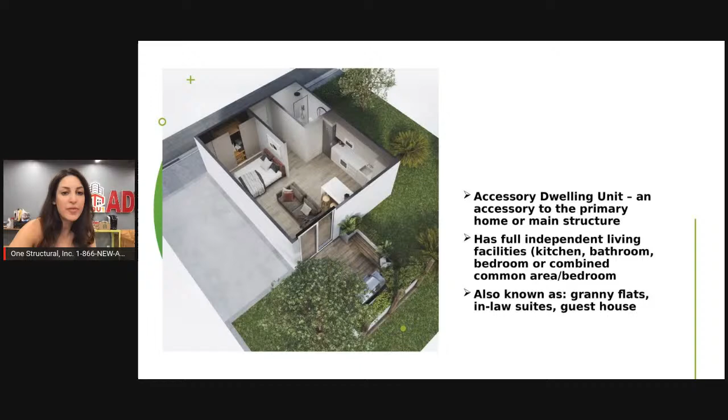That's our specialty, multifamily properties. We do still serve single family, but our specialty and focus, and especially in construction, has always been multifamily properties, whether they're single buildings, detached buildings, or very large HOA communities. That has always been our specialty across several trades. So now, luckily, apartment buildings are able to add more units, increase housing across the state, and increase the value of their property and get more monthly revenue, which is great.

ADUs have always been used for expanding your home, additions. This is more for single family relations, family staying with you, elderly family, which again, we do help with, but our focus really is helping you maximize your rental income. So that's kind of part of our feasibility reports. We provide these pro forma statements, market analyses, stuff like that for which configuration, within code and space permitting, can you do that's going to get you the best return?

And of course, that's based on construction costs versus the configuration that you can build, all compared to what rental income these sizes and styles will bring you. So we work with you to kind of help find that sweet spot for finding just what is the best use of my money for rental income, value, and so forth.

The types of ADUs that you can do, I will differentiate between single family and multifamily. The main types of ADUs that you're going to read about and hear about are attached and detached. They're pretty similar for both multifamily and single family, but there are a couple of differences.

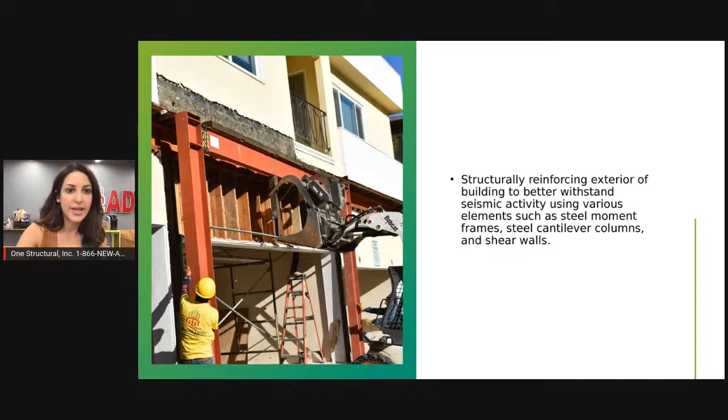So you can do it as these diagrams suggest. You can combine your seismic retrofit requirements, always meeting code, with the addition of these units. And so that would always be incorporated in the engineering plans that we design. So here's some samples. This is a multifamily building that needs to retrofit and wanted to do the ADUs. I think this is in Inglewood, and right now in Inglewood it is voluntary to do it.

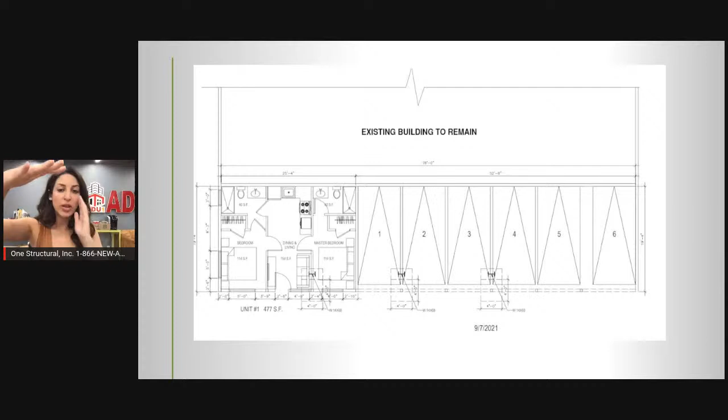But these owners were very proactive and smart, I would say, because you don't want an ADU in a tuck-under area, and then later in 2 years, your city does require you to do that, and you didn't have shear walls or that reinforcement in your ADU. You will have to go do the construction because it is technically still soft story if there are no seismic retrofit elements in the design and structure of that ADU. It's technically still an open space underneath a dwelling that wasn't reinforced. So we always recommend that if your city has not required it or mandated it yet, we will still give you that option to incorporate retrofit elements too.

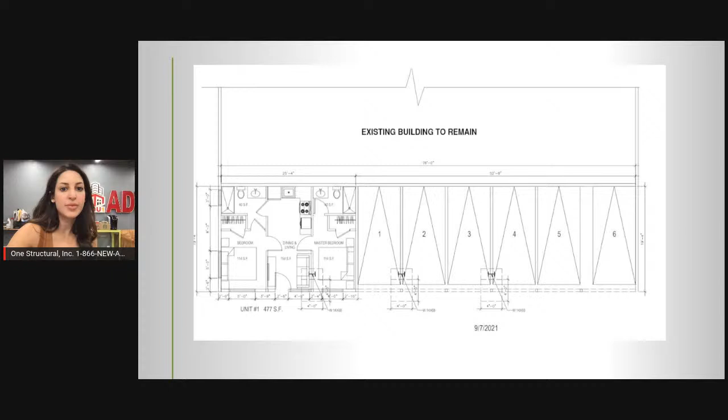So this is, I believe, the same building. This option was showing if they put the unit here, they would still have to, I don't know if you can see my cursor, still put some steel columns in the middle of the building because it was a 3-story building. This option is showing if you put the ADU in the middle, we could just do shear walls and incorporate it that way without additional construction outside of the ADU.

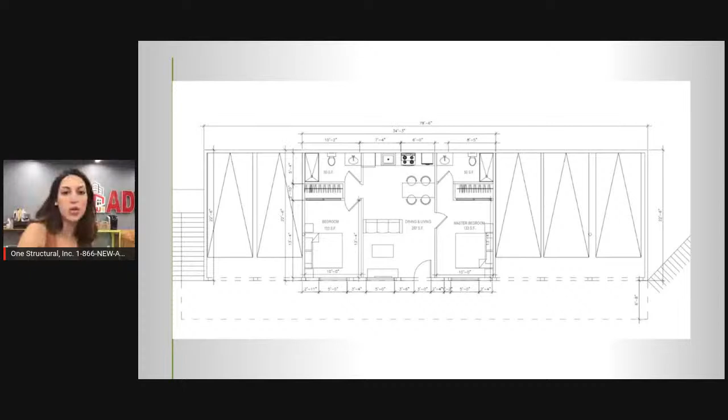I believe they actually ended up going, it should be here, sorry, with the ADU on the right side actually, but using more spaces. I think that's what they went for. I have to jog my memory. They went with using more parking spaces so that way the ADU gets some private patio space on the side, doesn't have to worry about cars entering, and then they were still able to use the shear walls too. So it's a really good choice.

And at the end of the day, people need housing that's going to be priced for what they can afford. If they can't afford a 1,000 square foot unit, it's going to be brand new, beautiful. It's housing, shelter over their head, new, designed very nicely, so it can make somebody very happy and be within their budget. So these units are needed for a lot of people or families.

Here is just showing some more design. This is somebody who's doing the up to 2 detached in their rear. There was, I think, an old dilapidated garage there that we're proposing to demo, and we are going to build basically a duplex in the rear of this multifamily property. This property specifically was in the historic preservation overlay zone, so we had to get the HPOZ involved and get their approval. It has to go through their clearance. So there are a lot of steps involved with this, but again, we handle it all, and we are familiar with all of the design guides for the HPOZ and historic sites.

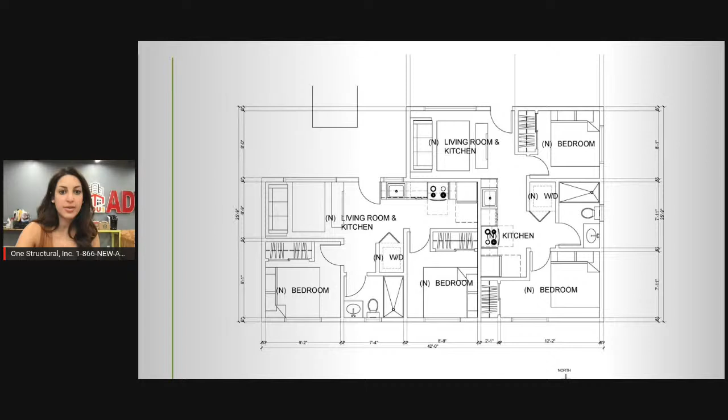This one is showing multifamily again, because that's our specialty, but we do have some single family in the pipeline. This is an existing carport in the rear of a multifamily property. We will be building 2 units on top. So we're going to be adding a stairway. We reconfigured the parking, so if you see here on the left, parking will just be pushed down, because parking can be in the setbacks and property lines. That's fine. But the building cannot. All new construction must adhere to setbacks.

So it is designed with the 4-foot setbacks all across. And actually, there's more that I can get to it. We had to get DWP clearance for this, encroachment clearances. They did have their own requirements, which we revised and got approved. It was quite a process, but we did it, so we can do it again.

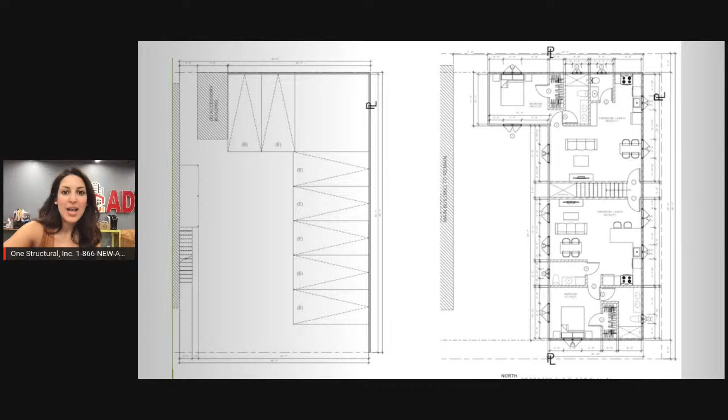Stairway, 2 units, very good size. It's going to be on the 2nd floor. This is a soft story building with, you know, 1 cubby space in the front and several in the back. It's being retrofitted both front and back while adding the ADUs at the same time.

This project is in Lake Balboa. We did full renovation on the main house and back. This project we are actually doing SB9 with. If you are not familiar with SB9, please check out our other videos about SB9.

Because that is something that if you have a lot of land, for example, and you want to do more, especially this is for single family homes only, R1 areas, if you have a gigantic land and 1 ADU isn't going to cut it for you, you might qualify for SB9. So we have other videos about that. Please check them out. And we are actually doing that to this property right now. I think we are adding 2 to 3 more units in the back of this single family home.

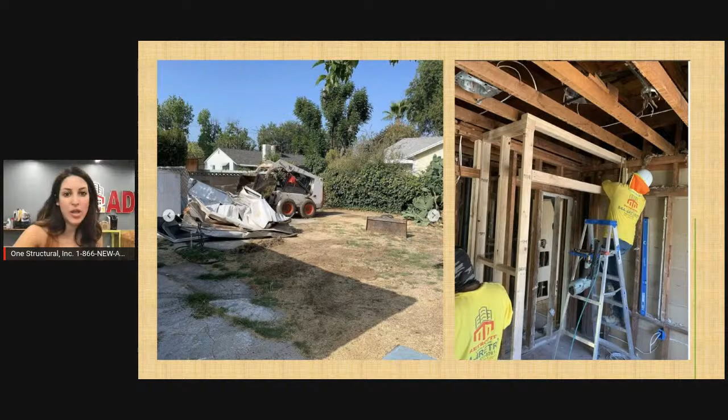This is a project we have going on right now in Inglewood on Flower, multifamily with tuck under garages. We're converting all of that to units.

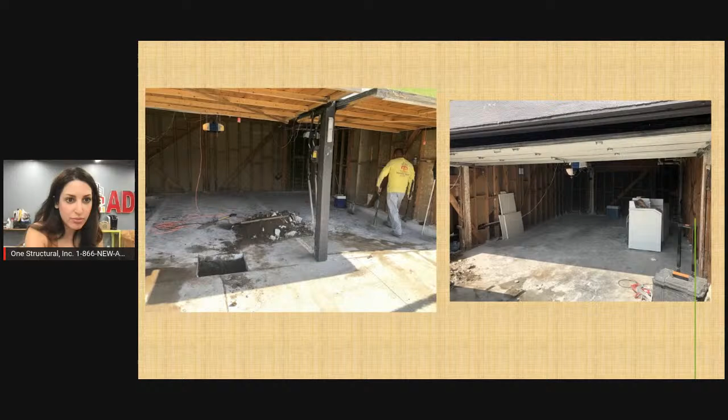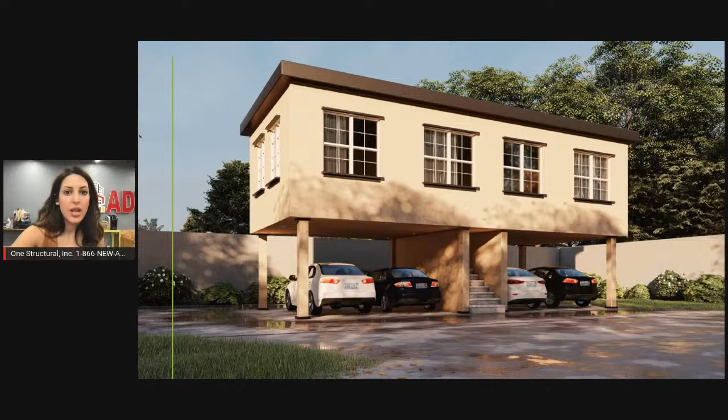This I think was very early on. We're already in kitchen cabinet installation and stuff like that at this project. And then here are just some renderings of building above an existing carport. Here's a sample of a 2-story structure. This is good when you have an open parking lot, for example, that you want to still preserve parking. We can still build your 2 units on top, or 1, whatever you prefer.

Parking rules: it says in the state law, if you're converting a garage or carport for the purpose of an ADU, you don't have to replace those spots. And if your house or building is within a half mile of public transit, like a bus stop, you do not need to add any parking. So in most cases, I would say 99%, you do not have to add or replace parking.

For rent-controlled units, if you are going to be using their storage or their parking that's within their lease, give them a 60-day notice that there's this change to their lease, and then you must reduce their monthly rent. The city gives a range, it's changed, like 60 to 260, something like that, I think, but it ultimately is up to what the owner or landlord or management company agrees with each individual tenant.

Certain things that are considered: how many spots are you taking away from them? How difficult will it be to find replacement parking on the street or at a monthly parking? How much will it cost? What's their current monthly rent? All of this kind of stuff. But again, their amenities are not protected, but their rental amount is. So if they're rent controlled, you have to reduce their rent, but you are permitted under law to use their storage and parking spots for ADUs.

Taxes and Prop 13: the ADUs do not trigger a full reassessment. You get a blended assessment based on the value of your ADU. Prop 13 also still stands because you keep that original amount.

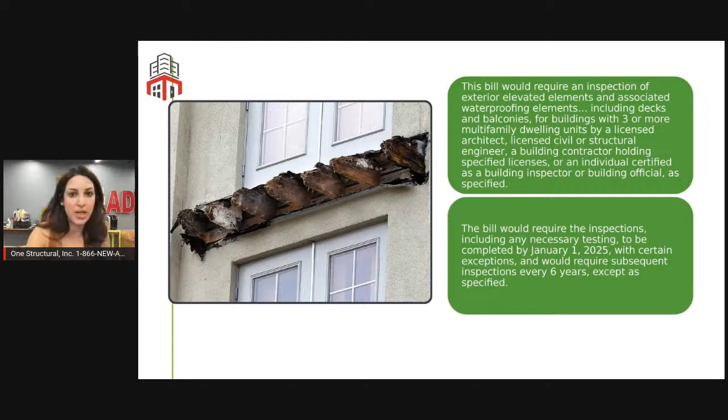And you know what? I think I'll just briefly go over this. I didn't intend to, but if you have a multifamily building, whether it's HOA condos or a 3 units or more apartment building, you do, under the law, have to get your decks, balconies, walkways, catwalks, all exterior elevated elements inspected under Senate Bill 721 for apartment buildings, or under Senate Bill 326, which is for HOAs and condos. So I'm not going to go into super detail right now.